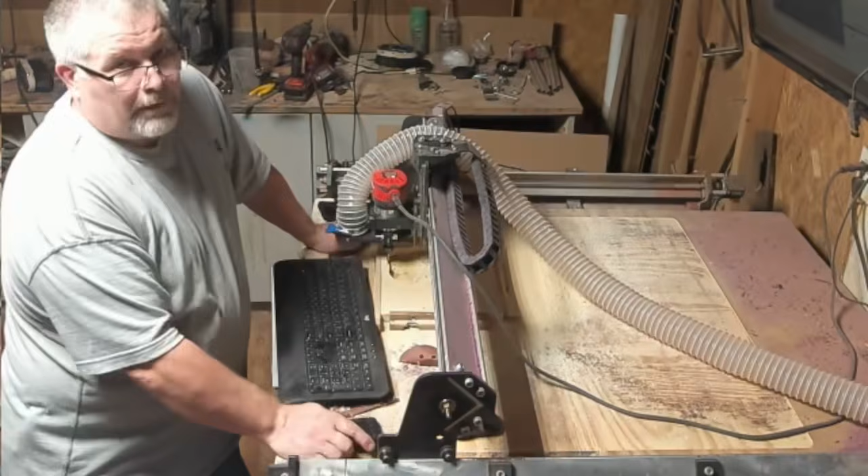Hello everybody, welcome back to the shop. We're out here at the CNC again today and it is hot out here. I am sweating bullets. We're going to make this a quick one.

I'm just going to run through Millmage real fast. We're going to go over tool operations, what you can run together and what you cannot. So let's dive right in and see what Millmage looks like.

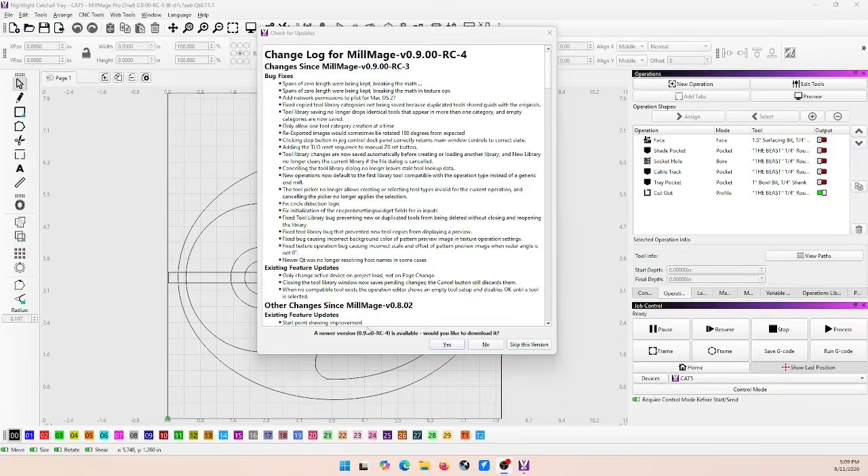Alright, I've got a project pulled up here. We've already got an update for Millmage, but we're going to do that later. This is Millmage version 9 RC4, so we'll get that one. I'll go ahead and download it, but we're not going to install it yet.

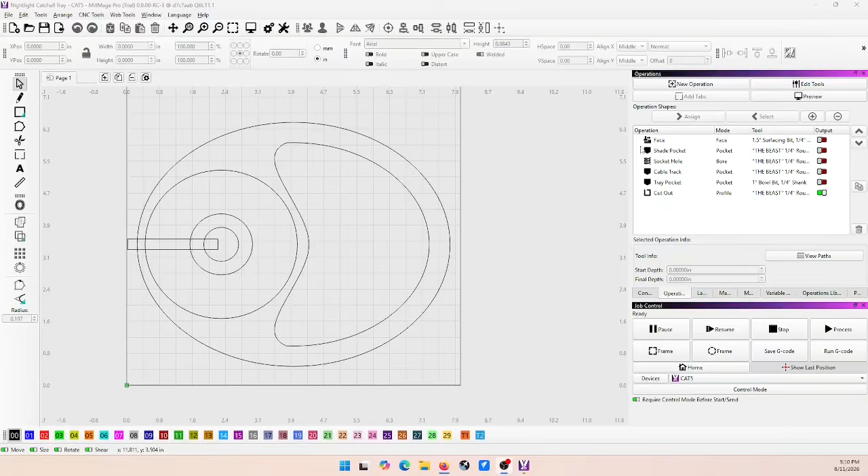I want to look at the actual toolpaths. This screen here is what I want to look at. You can see this is my catch-all tray that I've created in Millmage. I've got several pockets, several tool paths here. So I've got a surfacing pass, and of course we'll do this one by itself.

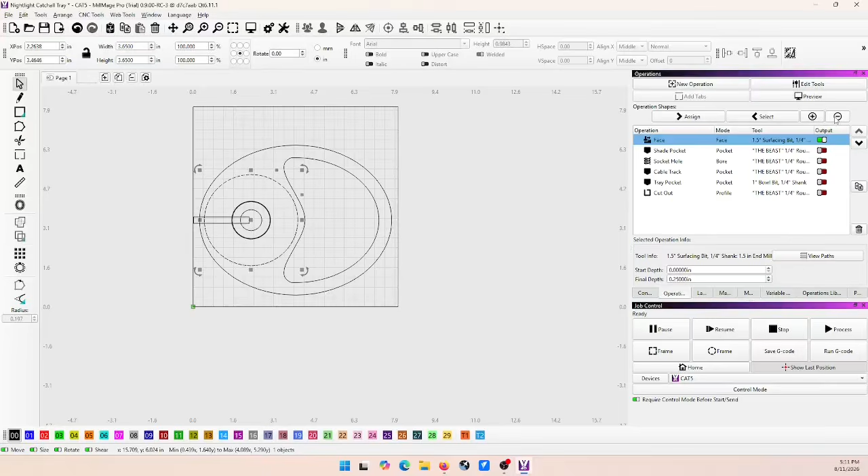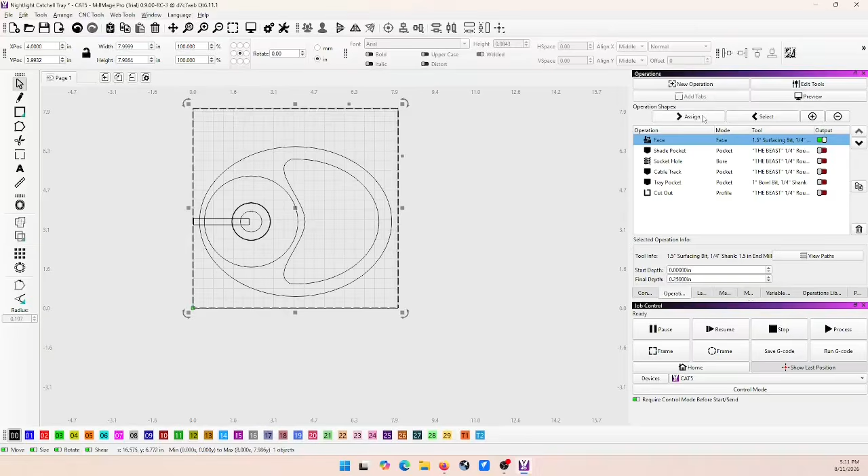Now I'm going to select my outer vector around my entire material. You can see I've got a square drawn around the entire material piece here, the workpiece. And with the facing operation selected, I'm going to hit the plus sign, or I can also hit assign, either one. And now when we go to view this operation, we can see we got a nice clean surfacing operation.

When it starts out, it'll come down here, it'll curve in, and it'll just surface this whole piece of material. All right, that will be by itself.

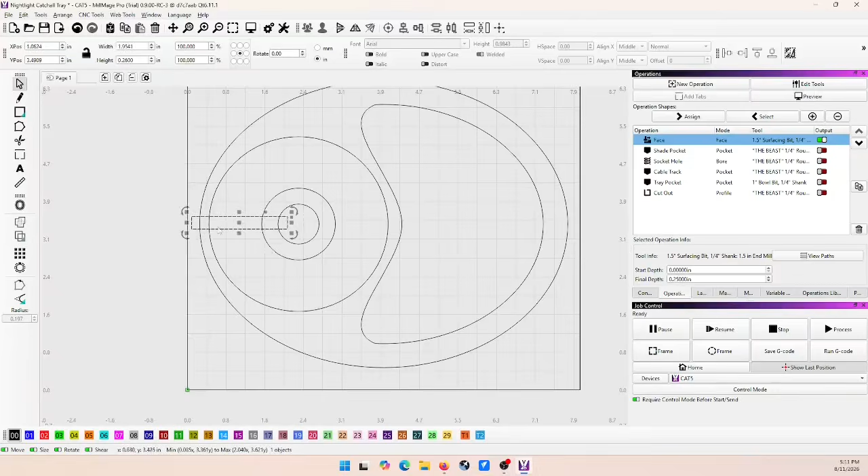When I get ready to carve, this is a cable track. This is a little slot in the back of my material that leads to the back where a wire will lay into. These two are a recess for the glass insulator to rest in, to act as a globe for the light bulb. And this is a bore operation, so it's going to bore a 1-inch hole so I can set a socket in it.

So all of these paths right here will be on using the same tool. So after I've got this surfaced, I will turn the surfacing bit off. I will turn the pocket, bore, and cable track all on.

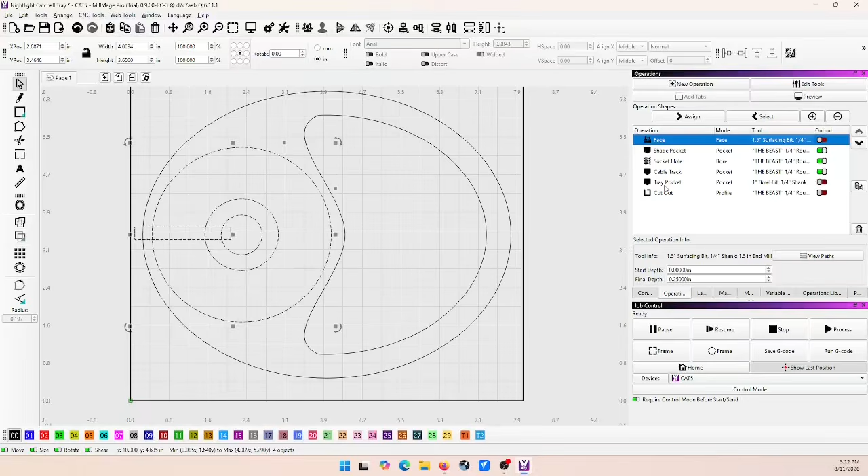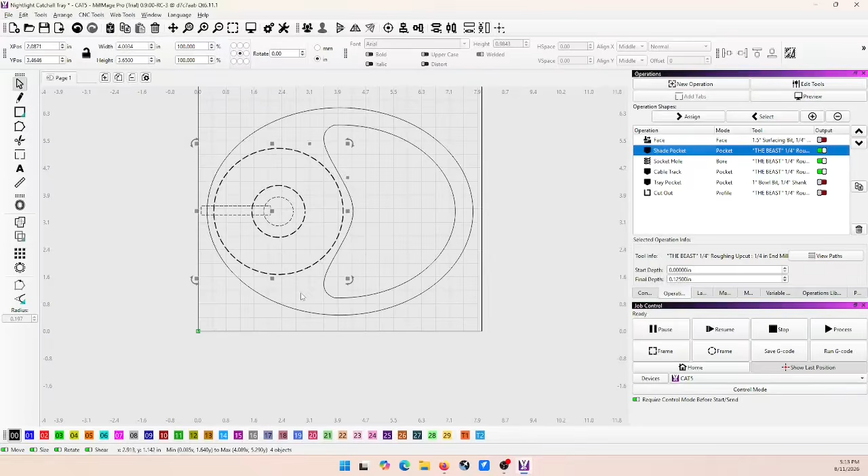And then I'll preview the job again. I'll run it with these three. And the way that's going to work is the shade pocket will carve first. I start my depth at 0, so what I've done, I'm going to zero my bit to the surface of the material.

And I'm going to start with a start depth of 0. The final depth is going to be 1/8 of an inch, 0.125. Hit OK. The next thing it's going to do is create this bore out, this 1-inch bore out.

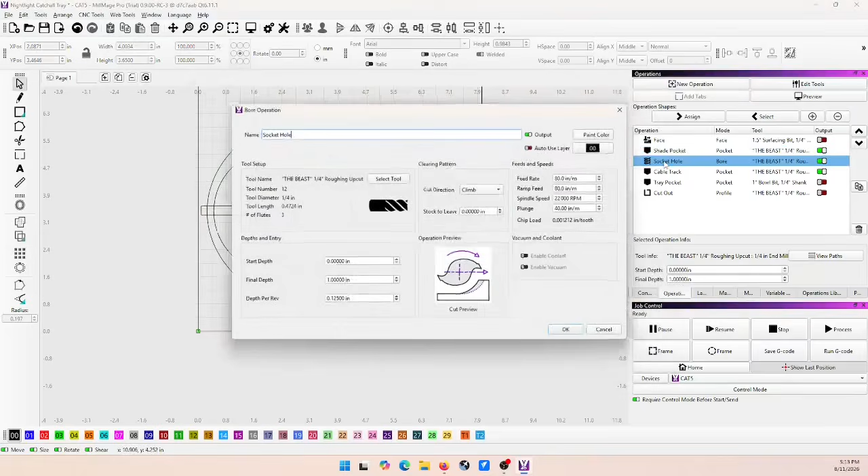I'm going to start my depth at 0. Final depth is going to be 1. And I'm going to step down 1/8 of an inch per rotation.

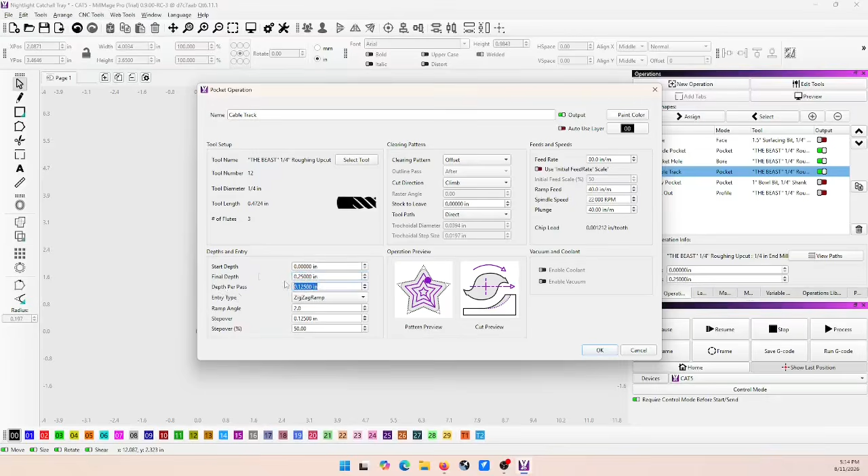The cable track, again, I'm starting with a start depth of 0. The final depth is going to be 1/4 of an inch, 0.25 inches. So you can see my depth per pass is set to 1/8 of an inch, so it's going to do that cable track in 2 passes.

Now for these 3 operations, I have zeroed my bit to the top of the material. I'm going to run all 3 of these operations at the same time. I do not have to re-zero the bit because I'm not changing the bit. Everything's going to start from that same start point value.

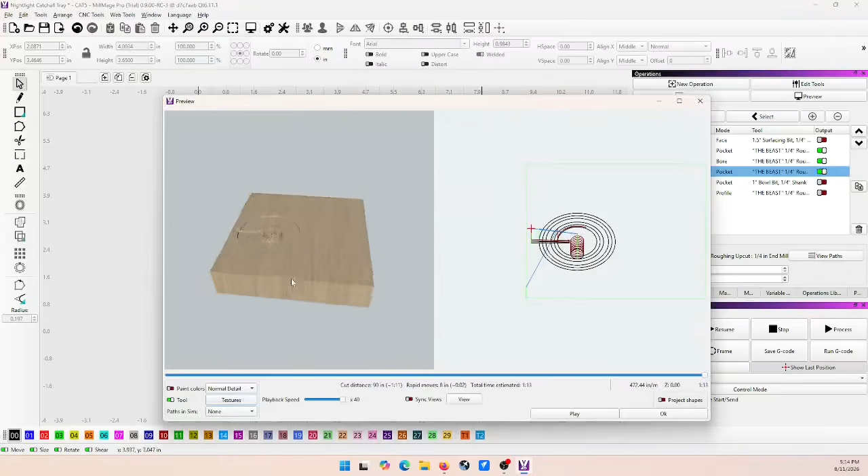So let's start my carve. And I know that was super fast.

So at 40 speed, we'll take this down to one speed, real time, and we'll play that out. You can see I've got my ramp options enabled, so the bit's ramping into the wood. You never want to plunge with an end mill because there's no cutters on the bottom of the bit. If you try to plunge with an end mill, you're going to heat the bit up and cause it to dull a whole lot faster than it should. Plus, if you're plunging holes, you could start a fire.

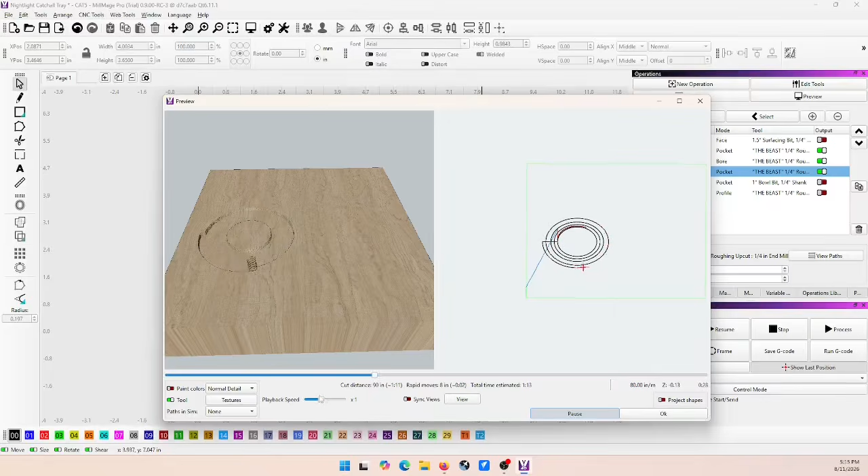We can speed this up just a little bit. You see it's going to bore down into make that pocket, and it's going to ramp into my cable track. All three of those operations completed at the same time. So I could go straight to my control mode, and you see all three of those operations are going to happen at the same time, with setting the Z one time.

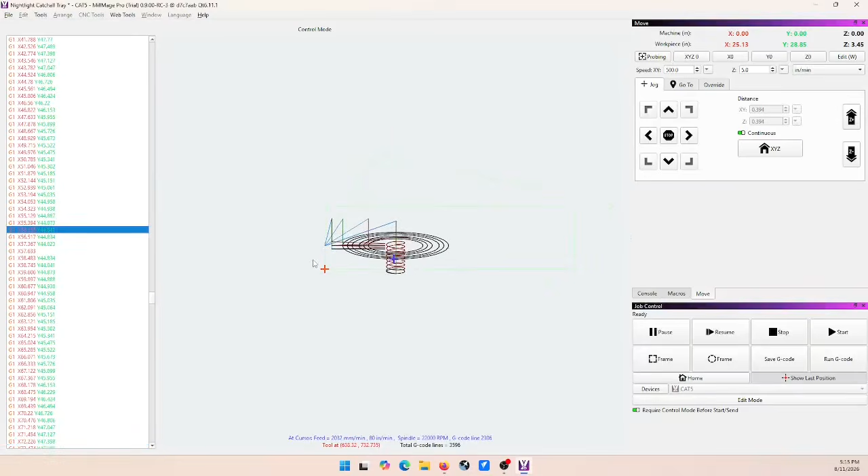Go back to edit mode. Now I don't want to turn all of these on because the machine does not know that I'm changing a bit here for this pocket, for this tray pocket. I'm changing out for a 1-inch bowl bit. So I'm going to have to turn these three off and do this one pocket right here by itself because it's using a 1-inch bowl bit. So if I hit preview, we can watch it.

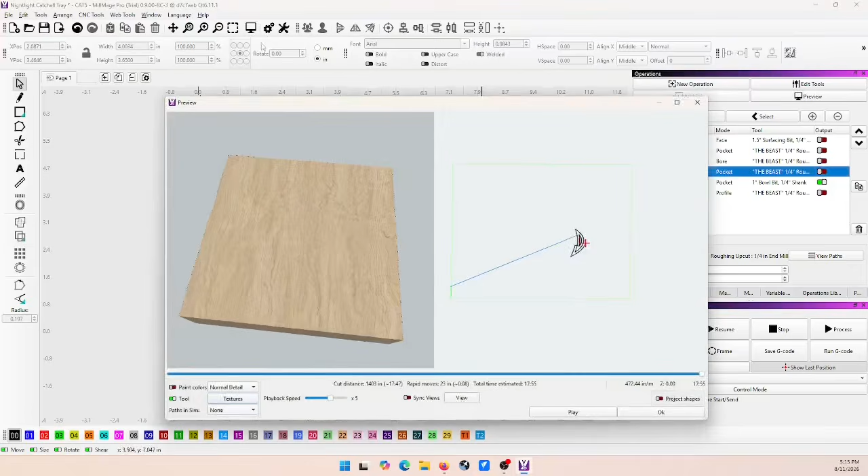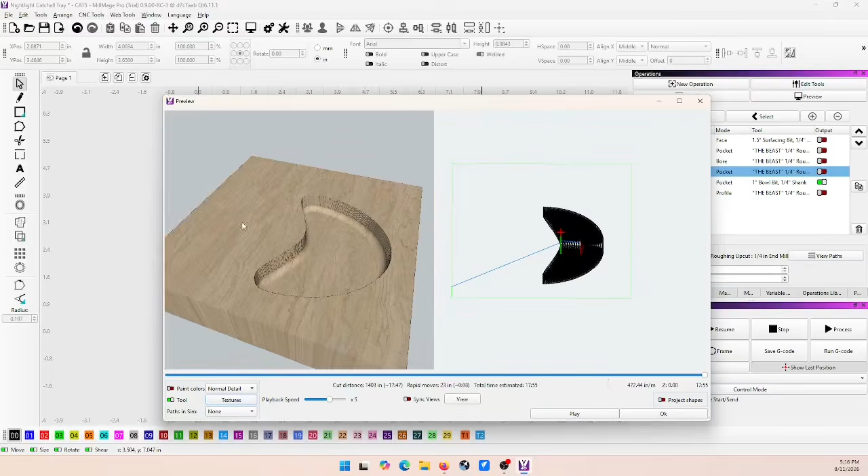It's going to carve right down into our material. You can see it's carved down into that material just fine. You can't see any of the other passes because they're not turned on. So I'll turn that off, and then I'll turn my profile on. This is our profile cut to cut this tray up. We'll turn that on, and you can see I've left myself some tabs on the bottom to hold it in place.

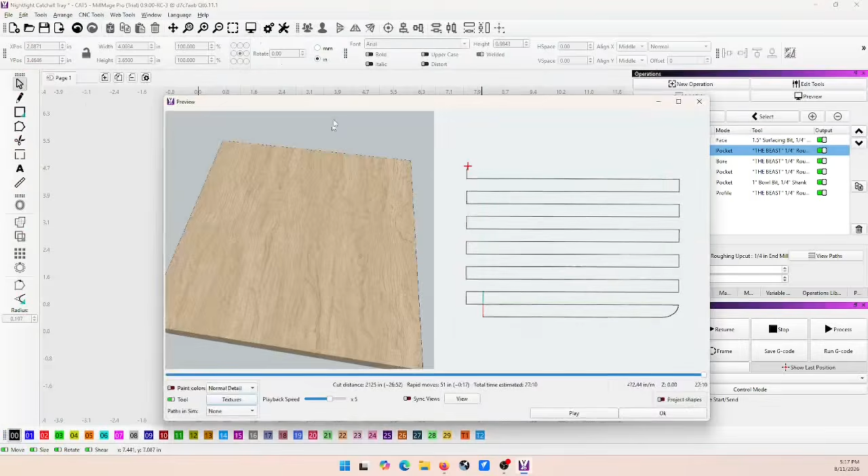Now if I turned all of them on, Millmage will try to run every single one of these straight in a row. It will not stop to let you change a bit, so you don't want to do that. But you'll see the entire project, all of them turned on. We'll preview it. You want to turn them all on when you preview these operations.

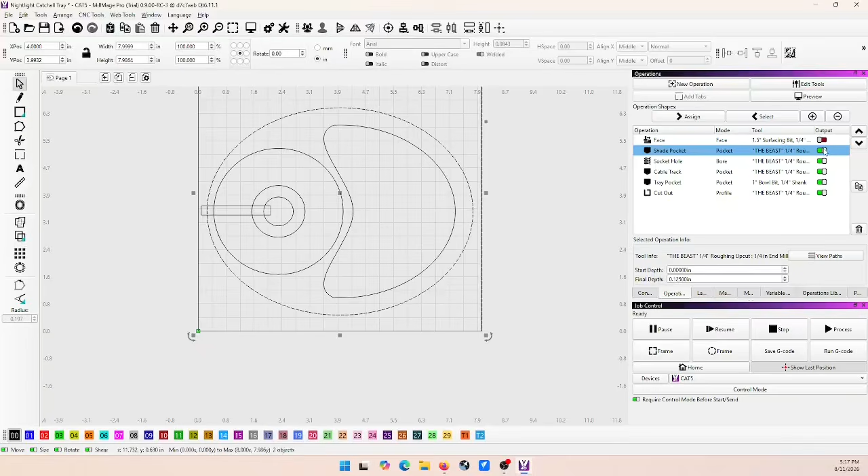I've got my surfacing bit on. I didn't mean to leave that on. That one you don't want to turn on. We want to start from the 0 point, not from a sub-0 point, from a surfacing bit. So we'll leave the facing operation off, and then we'll preview it.

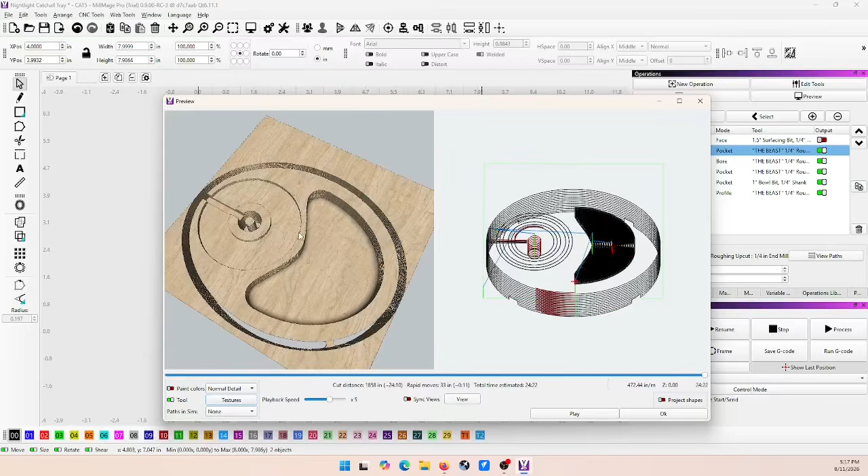So as you can see, what I've done here, I've left every one of my toolpaths on to view my completed project. But you do not want to run your machine like that.

Like I say, I've got these first three using the beast bit, so all of those can be on at the same time. When those three get done, I'll turn them off. I'll turn my 1-inch bowl bit on, and then I'll turn it off, and then I'll turn my last profile on. So that's how you want to use Millmage.

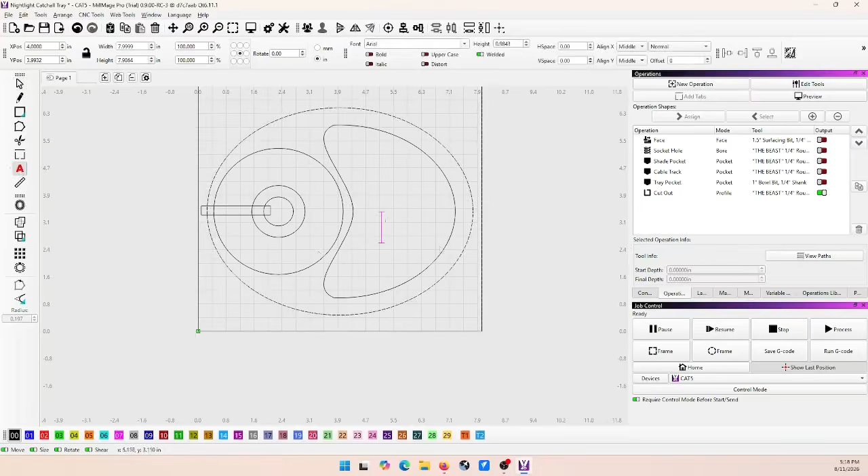Now, let's just say we're not done. Let's put another toolpath in here. Let's do a design. Let's put a name in here. Let's do a V-carve. Let's just put Jack in the shop.

And just say I'm going to run that. Not even, well, I will just scroll through the fonts real quick. Say we're going to do this one right here. I'll do that font. I'm not worried about lining it up and all this.

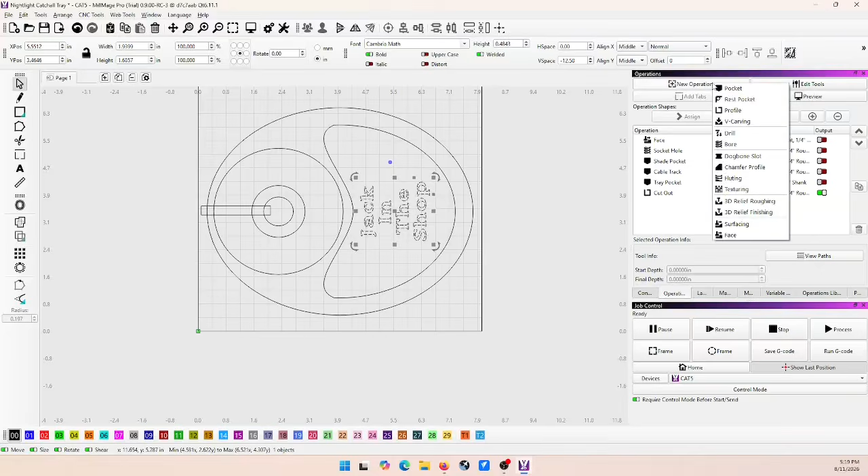I'm worried about putting a toolpath on this operation. So I'm going to click New Operation. We're going to do a V-carve operation. I'm going to select my bit.

I am showing 87.6 degrees and 77% humidity, 76 when I picked it up.

And I ran that down just a little bit to squeeze these words together a little bit more so they fit more comfortably in this pocket.

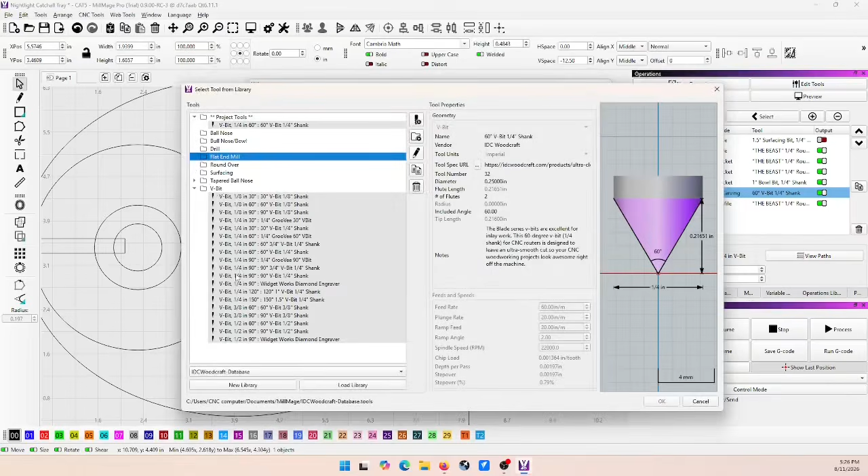With that selected, I picked up my V carving. I selected my tool, came over to my V bits, and came down to a 1/4 inch 60 degree. I just chose this one for craps and giggles.

For the start depth, I went back and looked at my final depth on my pocket. You can see our 1-inch bowl bit here. You can open this up and see what our final depth was, or all you got to do is select it. Your final depth is right here. You don't even have to open that toolpath. All your information is right here.

Now that we have that information, that's going to determine where we start at. Our start depth is 3/4 of an inch, and our depth per pass is 1/8 of an inch.

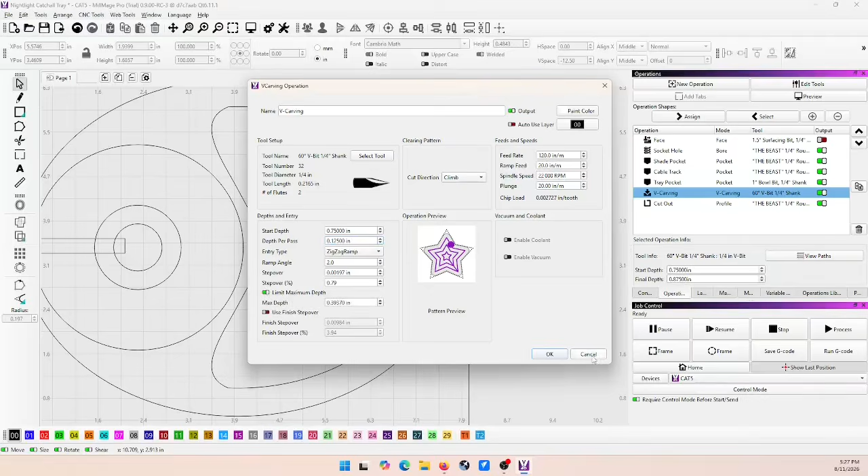If I wanted to limit how deep it goes, I would turn this button on and limit the maximum depth. If this was some extremely large text and the edges of the bit would not reach both sides of this vector, I might want to turn this on and limit how far that goes. But in this case, it looked okay, so I'm not going to use that.

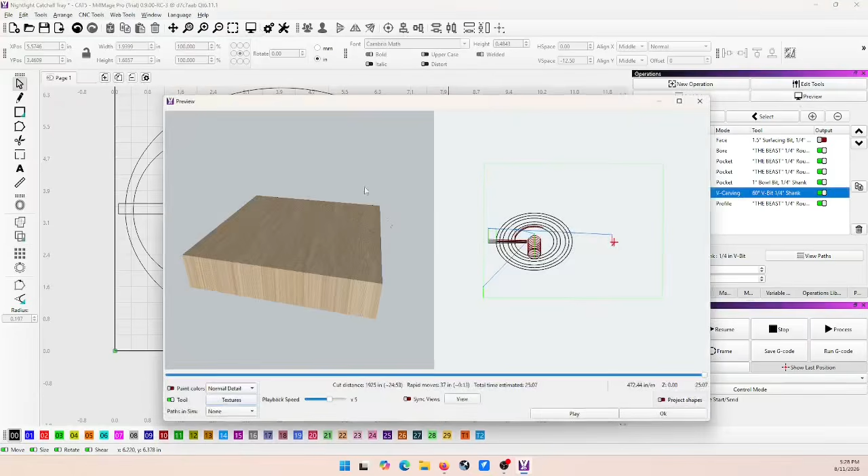With all of these selected, I'm going to do my preview. I can click it here, or I can click it here. We can watch this operation take place.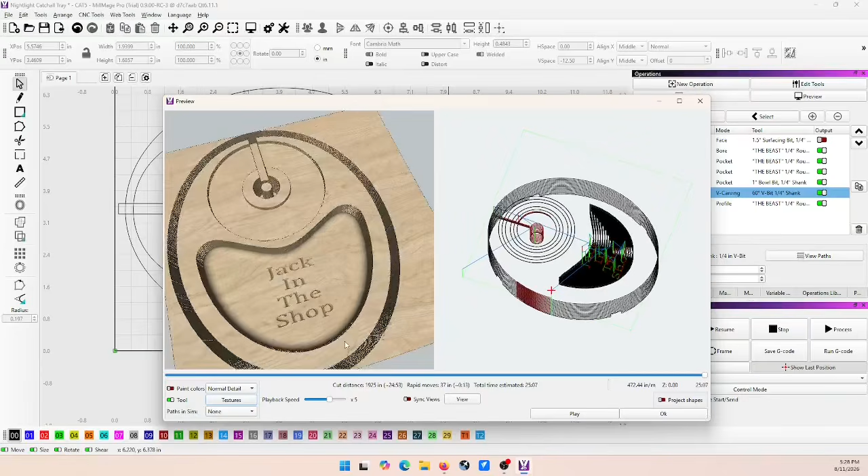That was really fast, 5x speed, but you get the gist right there. That text looks okay to me, so that's saying that V bit, the edges of that V bit was touching the insides of my vector, so I did not have to limit the depth on that text.

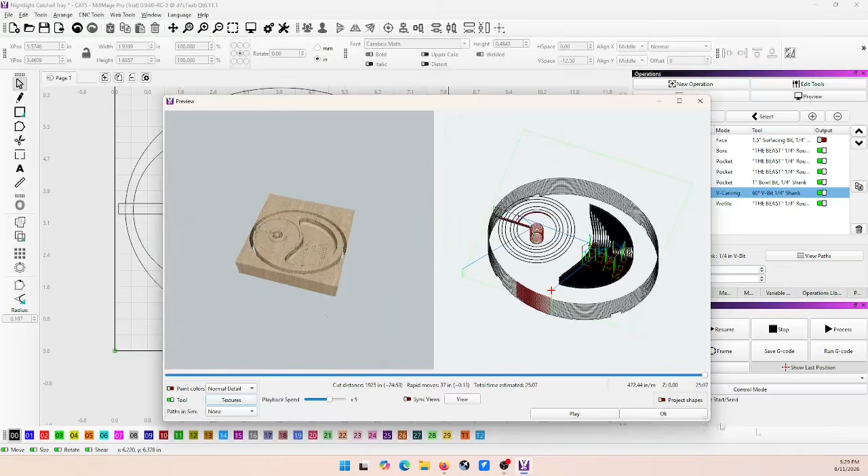That looks pretty good. So when I go to carve this project, again, first thing I do is surface the material to get it as thick as I want.

Then I can turn all similar toolpaths on, and you will be able to see all 3 toolpaths right there that I have turned on. Go back to edit mode, turn those 3 off, go to my 1-inch bowl bit, and you'll be able to see that toolpath.

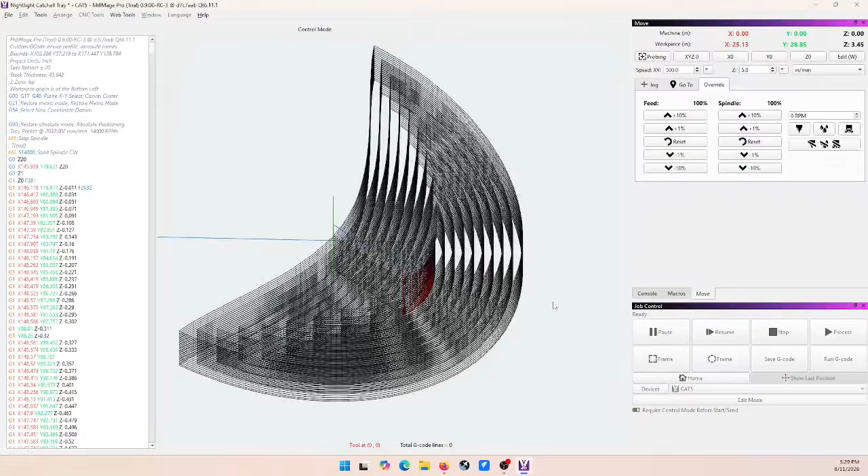And then I will do my V carving. You can see right there, see how deep that is right there? That's telling me that bit's going to come straight over and then plunge into my pocket. It's not going to crash into my material.

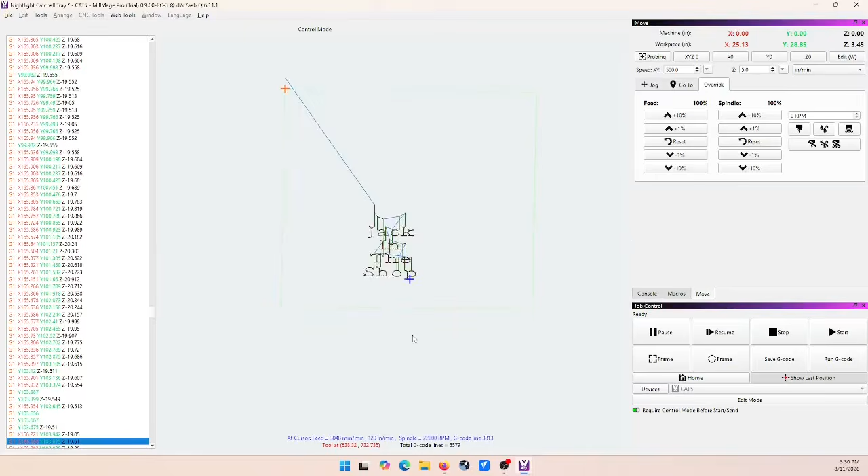And then I'll turn that off and do my final cutout, because that's another bit change. When I'm doing my surfacing bit, of course you zero to the top of your material. When you change that bit, you've got to zero it again, and it's going to run these 3.

I don't zero it again until I change the bits for this bowl bit, then I'll re-zero the bit to the top of the material. Then I'll re-zero the bit again when I change it for this V bit, because I'm changing the bit. And on this last operation, I will re-zero again.

When I say re-zeroing, I'm only re-zeroing the Z, I do not have to re-zero the X or the Y. And that'll give you your operations there. So you don't have to do them one at a time, but you do have to group them with the same bits. If you do a bit change, you've got to do a separate operation.